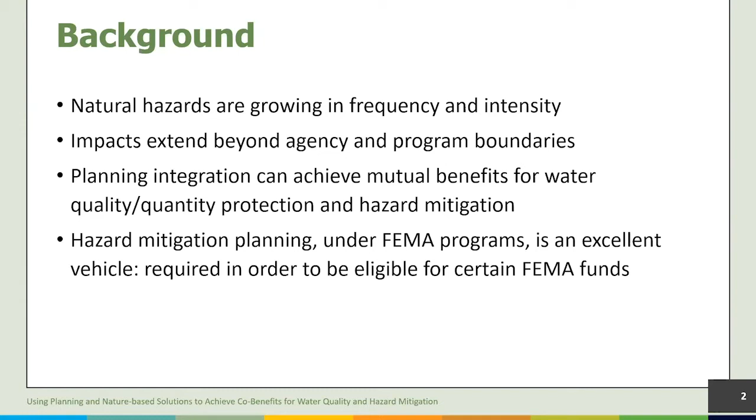Hazard mitigation plans are required for a state to be eligible for certain FEMA funds, so these plans are a logical place to highlight this connection and plan appropriate actions. Several states have successfully integrated environmental goals into mitigation plans. We'll provide HMP excerpts from these states later in the presentation.

Alone, natural hazard and water quality programs face barriers to success because they have limited resources and staff to tackle issues. When programs are integrated, success of achieving mitigation and environmental goals dramatically increases. This makes sense because the issues aren't independent, nor should they be siloed.

Natural hazards affect water quality. For example, heavy precipitation events and rain-on-snow events often lead to flash flooding in vulnerable areas. Land management and planning can exacerbate flooding by changing the perviousness of a watershed and leave communities more susceptible to inundation. Uncontrolled discharge of pollutants, for example chemicals, during flooding can also pose risks to groundwater and surface water.

Water quality impacts health risks. For example, harmful algal blooms can pose a threat to human health and aquatic communities. Toxins produced by certain harmful algae and cyanobacteria can cause water-related illnesses in humans, pets, and agricultural livestock. Exposure occurs through direct contact with recreational water or consumption of contaminated drinking water, fish, and shellfish.

The goals of today's presentation are to see how nature-based solutions can be used to protect water quality and help mitigate natural hazards, review a local project using nature-based solutions, and learn more about major water quality planning and funding programs. We won't go into detail about hazard mitigation planning since we know this audience is familiar with the HMP planning process. We'll walk through efficiencies gained when integrating water quality and hazard mitigation planning, and learn how to set goals and strategies that allow for integrating the two types of planning.

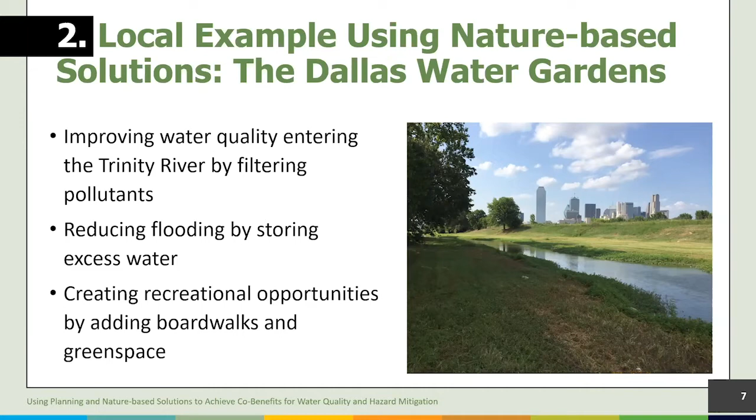The actions that ensure long-term success of the Cedar neighborhood project include incorporating future community investments and goals, monitoring water levels to document success and indicate maintenance needs, and integrating other area projects, including the Dallas Floodway Project, the Trinity River Corridor Balanced Vision Plan, and the Dallas High-Speed Rail.

The initial system design of the water gardens generally consisted of field activities, hydrologic and hydraulic schematic design, and ecological design. This initial study, completed in June of 2019, included an inventory of ongoing and proposed infrastructure projects in the study area, evaluation of soil properties, groundwater and surface water quality evaluations, hydraulics and hydrology modeling, water quality modeling, and concept schematic and ecological designs.

The analysis consisted of evaluating several alternatives for mitigation of increased flood risk due to the conversion of the upper ponds to constructed wetlands. The evaluated mitigation options included capacity increase of the upper ponds via lateral expansion and excavation, using a gated structure to release water before a major storm, and adding underground storage features.

Each option was evaluated against 8 guiding principles, consisting of evaluating flood risk, water quality impacts, impacts to the local economy, habitat creation, connection to the Trinity River, visual appeal, mitigation of urban environmental impacts, and opportunities for active recreation and wellness. The recommended alternative consisted of a weir between ponds 3 and 4 as the primary water impoundment structure, and increasing the capacities of ponds 5, 7, and 8 through a combination of lateral expansion and excavation for flood risk mitigation.

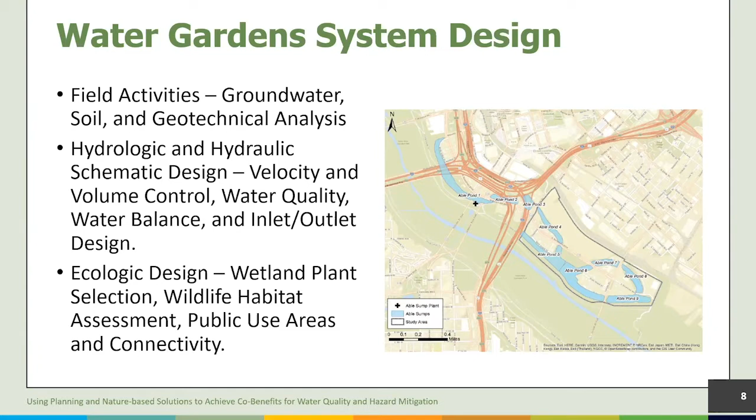The assessment of hydraulics and hydrology of the existing and proposed conditions were completed using XP-SWMM, a commercial version of the EPA stormwater management model. Important considerations for the modeling were the Able Sump Station and sump connectivity, existing and future pond connections, Able Sump pond interaction and sensitivity, and the 100-year floodplain.

All proposed alternatives were designed so as not to exceed the 100-year floodplain criteria. The stormwater model was also used to evaluate long-term hydrology conditions and to assess water quality impacts under existing and proposed conditions. The long-term modeling was also used to establish different zones associated with the constructed wetland, discussed later.

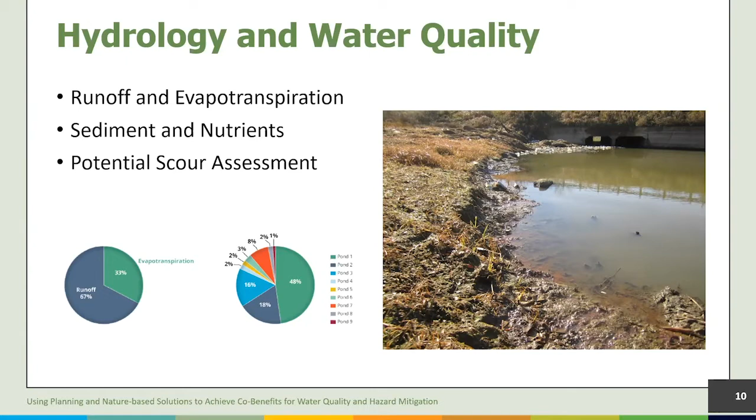4 alternatives were evaluated. Option 1 consisted of widening ponds 4 and 5. Besides a weir, this option requires expanding existing pond footprints onto nearby vacant parcels. Option 2 consisted of deepening pond 4, which requires excavation of 2 to 3 feet below the existing pond footprint. This is not an ideal option since the normal pool depth is deeper than desired, and there's potential for more pollutants entering the upper ponds during smaller events.

Option 3 consists of an automated control structure, which would require the city to operate the automated slide gate to reduce normal pool prior to large storm events. This option also does not require excavation or pond expansion. Option 4 consists of underground storage. This option also does not require excavation in the ponds, and instead proposes using underground storage or infiltration basins to temporarily store water.

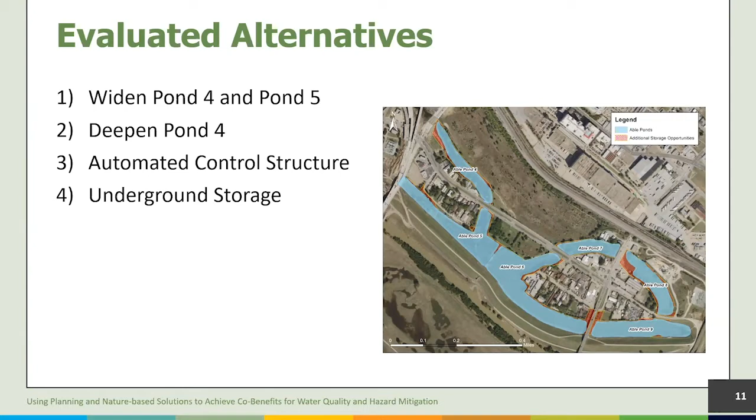All 4 alternatives were evaluated against 8 guiding principles, which consisted generally of connection to the Trinity River, mitigation of urban environmental impacts, enhanced visual interest, improved water quality, absorbing storm events, encouraging active recreation and wellness, creating habitat, and boosting the local economy.

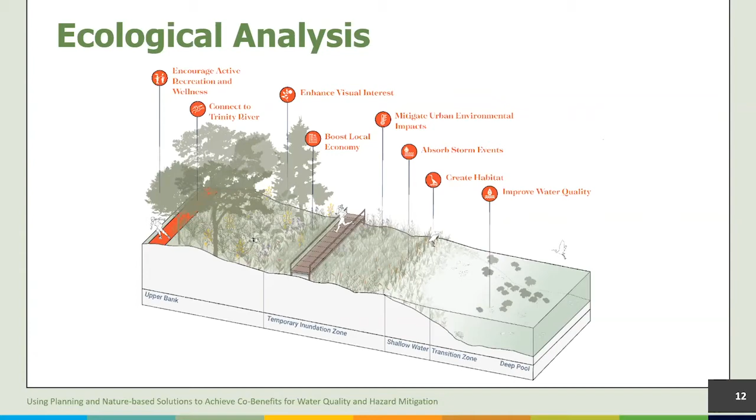Stormwater wetlands are comprised of continuous vertical zones that mimic the structure and function of natural wetlands. Zones are defined by relationship to permanent water level, frequency of inundation, water depth, and/or slope. Different zones provide different ecological services, including but not limited to pollutant removal, habitat provision, and erosion control.

Wetland design, including the upper bank, temporary inundation zone, transition zone, and deep pool, were informed by the hydraulics, hydrology, and water quality modeling. Plant community selection for each wetland zone was based on suitability for the given geography and climate.

The subsequent phases of this project will consist of design and construction of Cadiz Street and Riverfront Boulevard bridges, subsurface utility engineering for adjacent utilities, survey of upper ponds, forebay or green infrastructure to prevent pond sedimentation, and U.S. Army Corps of Engineers permitting.

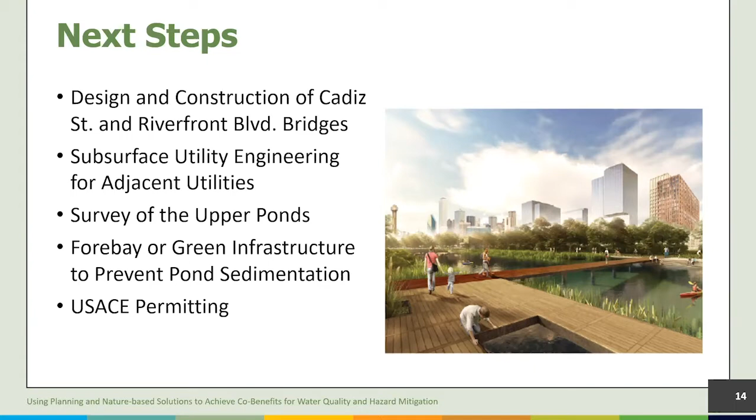Thanks, Sam. So the next part of the presentation, you'll learn more about water quality protection and planning at a high level. So what are these types of planning programs and what do they achieve? You'll understand efficiencies gained when you integrate water quality and hazard mitigation planning, and then you'll learn how to accomplish all of this.

All right, now let's dive into an overview of water quality programs and associated plans, the program objectives, and elements of each program that are relevant to hazard mitigation.

EPA water quality programs include the NPDES program, which regulates point sources like wastewater treatment plants, industrial treatment facilities, and stormwater from construction sites, municipal separate storm sewers, and industrial site runoff. As many of you know, the stormwater permitting program for cities with MS4s has been actively supporting the kinds of joint flood control and mitigation and water quality objectives that are at the heart of integrated hazard mitigation and water quality planning.

The non-point source pollution control program overlaps significantly with hazard mitigation goals. The NPS program, which includes a planning element using watershed plans and cost share funding to implement BMPs, is particularly relevant for hazards that might be related to drainage management in more rural areas.

Next is drinking water source water protection, which protects sources of drinking water from harmful pollutants, such as chemicals, sewage, and other harmful substances. Another relevant program focuses on wetland protection and restoration.

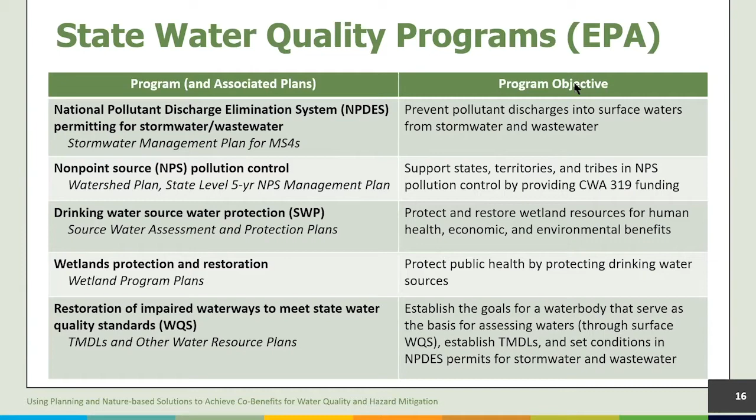All of these water quality programs have elements relevant to hazard mitigation, but in the interest of time, I'm just going to focus on two.

Stormwater management plans developed as part of the NPDES program are included in the HMP checklist of requirements. The NPDES program also implements activities that alleviate flooding hazards while improving water quality.

The key elements of the watershed-based planning approach used by the NPS program include point source and non-point sources of pollution, through a process that closely resembles the planning steps for hazard mitigation planning and the National Flood Insurance Program's Community Rating System, or CRS, program.

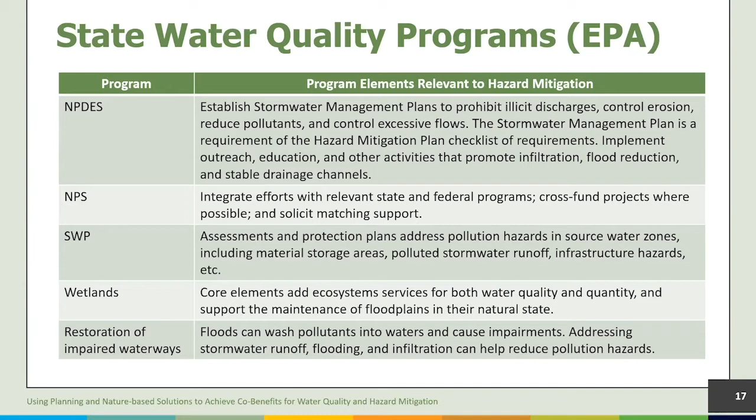BMPs funded by this program can also reduce hazards. For greatest effectiveness, it's a good idea to base NPS watershed plans on the flood and drought risk components of HMPs.

I've mentioned hazard mitigation planning without going into detail. As many of you know, hazard mitigation planning involves engaging stakeholders, conducting an assessment, defining goals, identifying opportunities, and creating a strategy to address problems or deficiencies.

Now that you have a better understanding of water quality programs and planning, let's look at how to integrate those planning steps with hazard mitigation planning. I'll do a bit of a crosswalk on the planning programs and their steps, discuss which stakeholders to involve, and talk about funding opportunities.

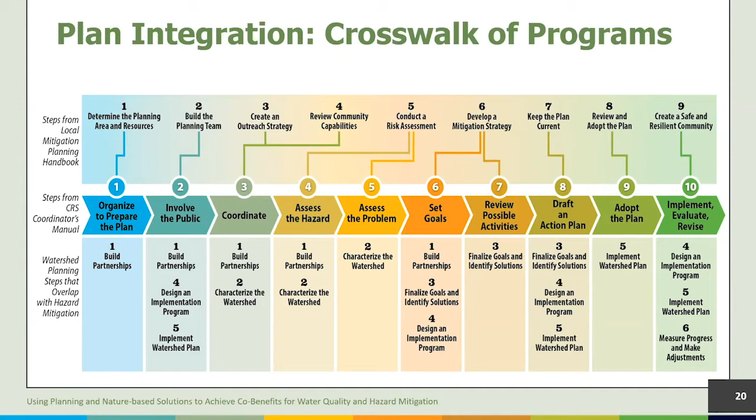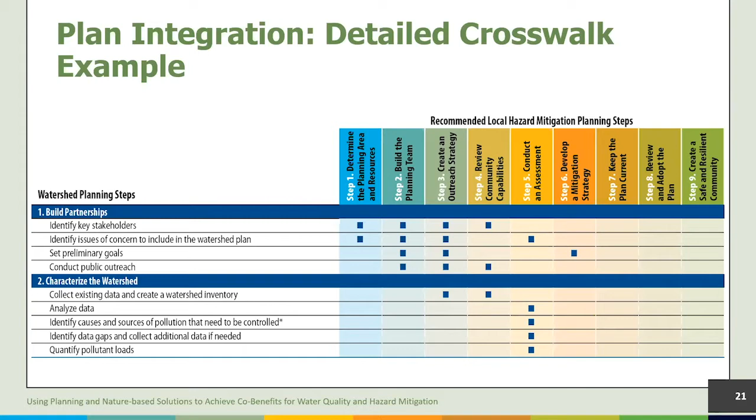They can then help local hazard and water quality planners explore how best to fold their efforts together in those areas where it makes the most sense.

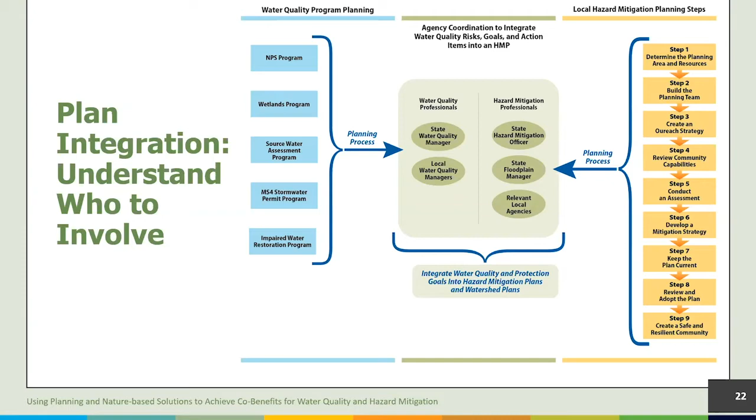We know funding dictates a lot of what programs are able to accomplish. By integrating program efforts to achieve shared benefits, managers can make limited dollars go further. Funding an integrated effort usually depends on the type of financing typically available to hazard mitigation and water quality planning. So grants, loans, taxes. Most people are familiar with these, and sources are available on both the hazard mitigation and water quality side of the house.

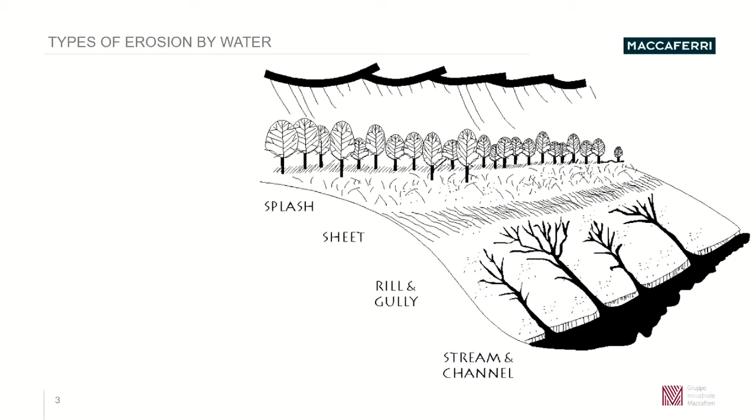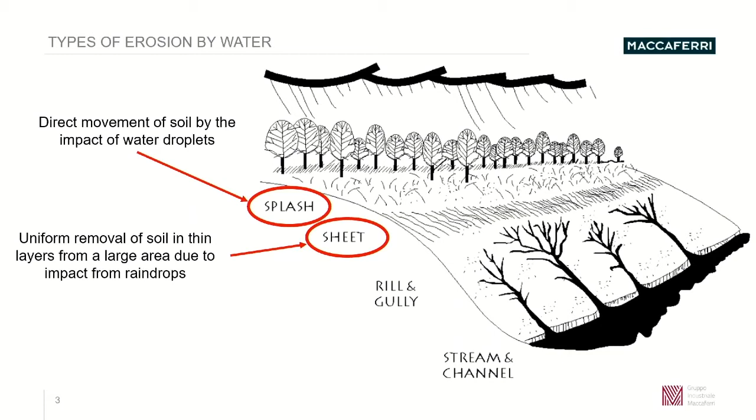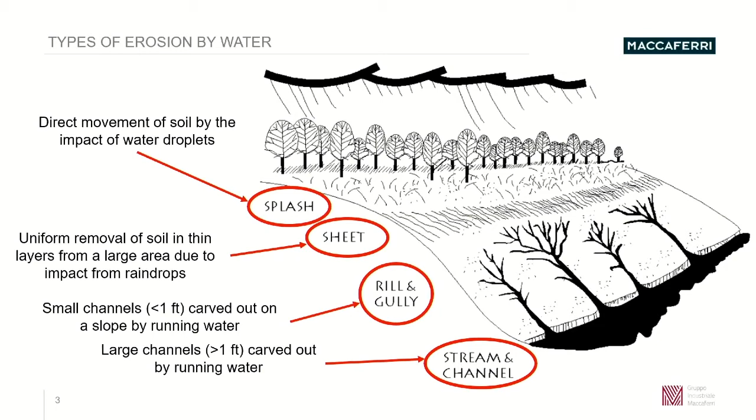But let's start introducing the type of erosion by water. The very first step is the so-called splash effect, when you have direct movement of soil due to impact, for example due to rain, of a water droplet. The second step is that you start to have uniform removal of the soil, and you see a very thin layer on top of the soil. After that, you have the rill and gully stage, where you have the creation of small channels, less than 1 foot, carved out on a slope by running water. And at the end of the day, you have the large channel, more than 1 foot, carved out, again due to running water.

What about wind? You also have erosion by wind, with three main types. Soil creep, when you have a rolling of larger soil particles across the surface, with some bouncing. Also suspension, where the finest particles get into the atmosphere over long distances due to strong wind - for example, in Italy you can find desert particles or soil particles from the Sahara region, so they can travel very long distances. And last but not least, the saltation type of erosion, where you have movement of soil particles with sharp bounces along the surface, displacing additional particles with each impact.

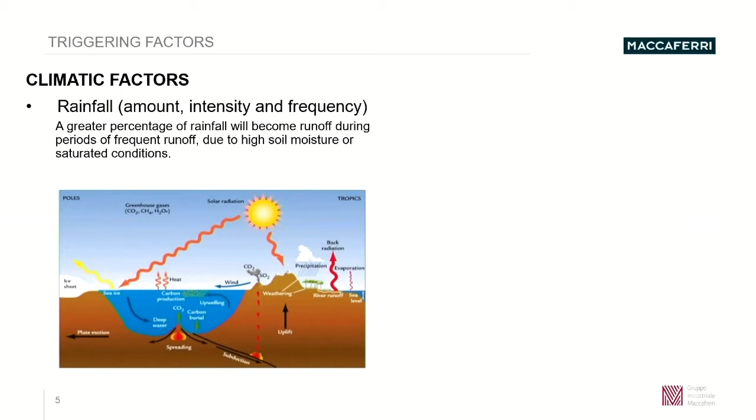But not only water and wind - other triggering factors can help the natural erosion process, such as climatic factors like rainfall. We need to check the amount, the intensity, and the frequency. If we check, for example, the US, using information from USGCRP, you can find that in most US regions, if you check the total annual precipitation and the heaviest 1% of events, in many areas the indicator shows an increase in the relative amount of rain that falls as heavy rain.

So the quantity of heavy rain is increasing, only in the West and Pacific area is it decreasing. But most of the country now receives more rain as heavy rain than it did in the past.

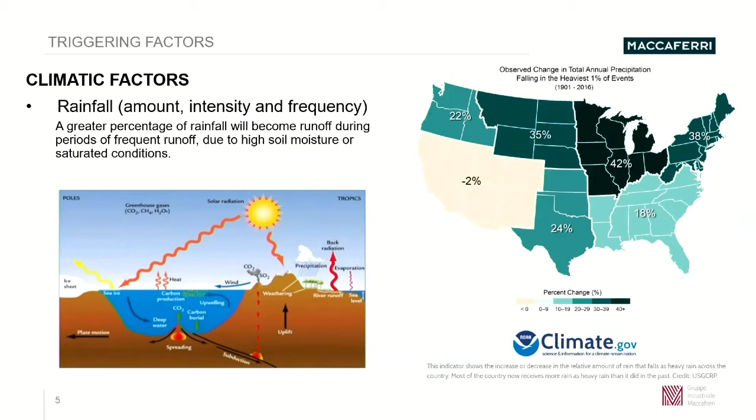But not only that, the temperature can affect the erosion process, because the temperature can affect the organic matter present in the soil. And if we check the heat wave frequency, we can see that it is higher, and the heat wave season length is always higher.

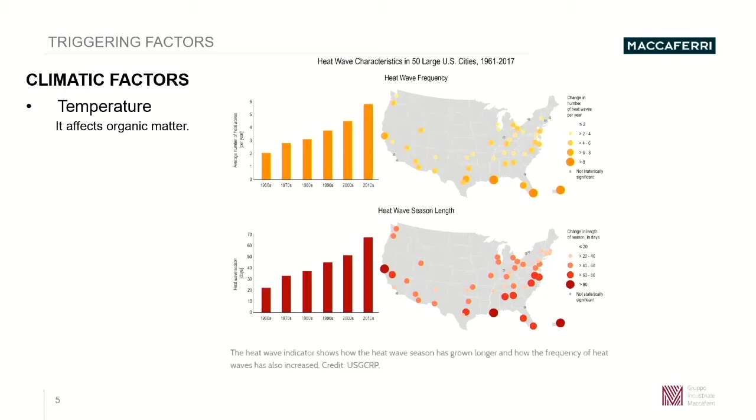So basically the organic matter is affected by this change in the climate, but also the vegetation. The vegetation is very important, is paramount for the protection of the soil.

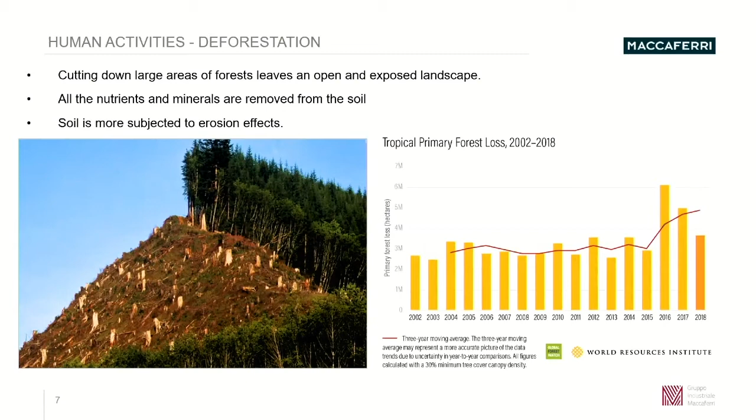Going forward, some human activities can also affect the erosion process, such as deforestation. If we cut the vegetation and trees already in place on top of a slope, the nutrients and minerals are removed from the soils, and the protection of that soil is also removed. So that soil, previously covered by vegetation, is now exposed directly to rain, wind, and all the aspects we covered before. So deforestation can affect the erosion process.

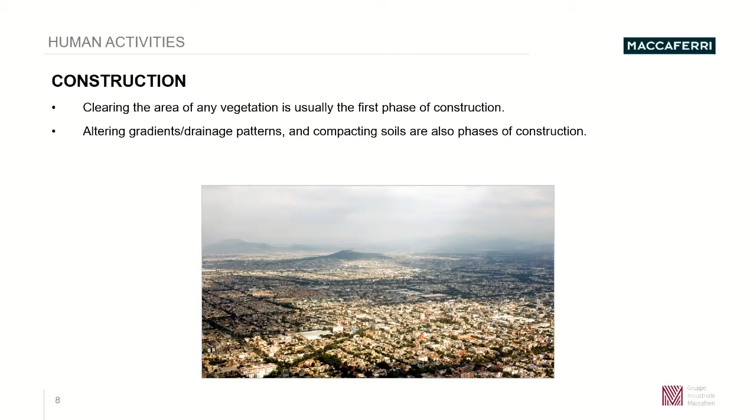But what about construction? When we construct a new residential area, we are changing the environment, changing the vegetation, altering the gradients and drainage patterns, and compacting the soil. If we check, for example in the US, the percentage of urban and built-up land area from the 1980s up to the 2000s, we see that urban areas are increasing. What does this mean? We have higher runoffs and always bigger quantities of water because we are increasing the impermeable surfaces on top of the land.

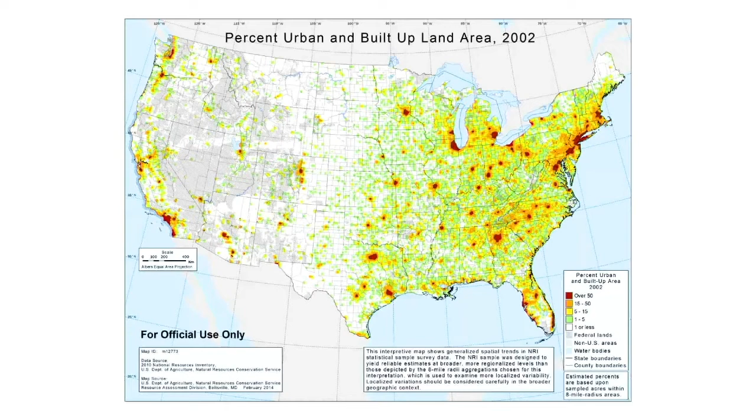But when we saw the definition of erosion, we saw what can affect the erosion process, but we also need to check the erosion control classification. We can check as a source the Federal Highway Administration manual, found in the design of roadside channels with flexible linings. The Federal Highway divides erosion control solutions into main families: rigid linings or flexible linings. For rigid, we can think about soil cement, stone masonry, or grouted riprap to cover the soil.

But what about flexible linings? Also in flexible linings, we can divide into long-term solution, transitional, or temporary. For these, we can always check the classification, for example checking the ASTM or the IECA, the International Erosion Control Association, or also the Erosion Control Technology Council, in order to define this type of system.

For example, today we're going to see examples of a turf-reinforced mat, non-degradable, used for erosion control application. And in this case, we have some examples of materials that can be used. If we are talking about temporary erosion control applications, we have the so-called erosion control blankets that are degradable. The material can be, for example, coconut fibers, straw fibers, or natural fibers.

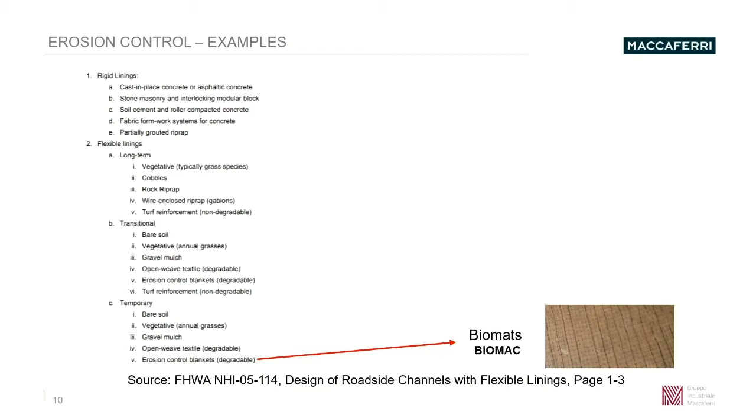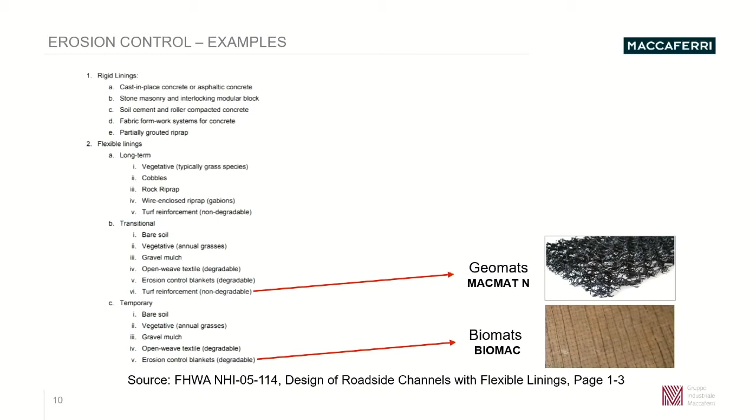They are temporary. If we have a transitional solution, non-degradable turf reinforced mat, we also have a three-dimensional mat that can cover the soil and protect it from erosion due to water or wind. We also have a long-term solution such as the high-performance turf reinforced mat, reinforced with a different material, and also things like wire-enclosed riprap or using gabions for erosion control applications.

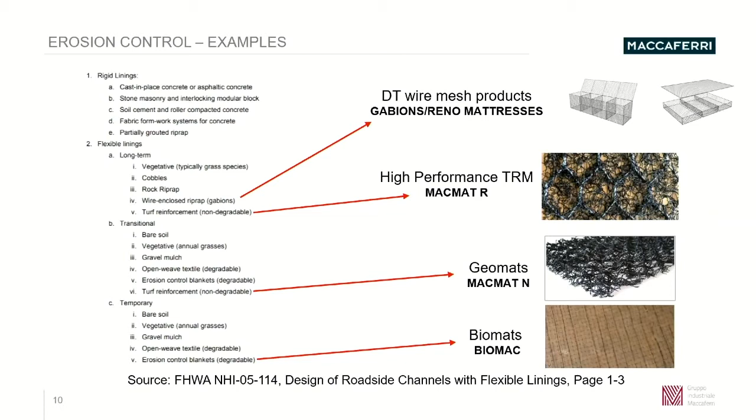But today in the presentation, we are going to focus on the use of geosynthetics for erosion control. And what's the target of these materials?

We need to create a physical barrier which absorbs water and wind impact on soil. Those solutions are very effective in preventing or limiting soil loss. And we want to enhance vegetation growth, because we saw how vegetation influences erosion control and the amount of eroded soil lost per year. You remember the Utah study that we presented. And also, at the end of the day, what we want to do is increase the shear strength of the soil.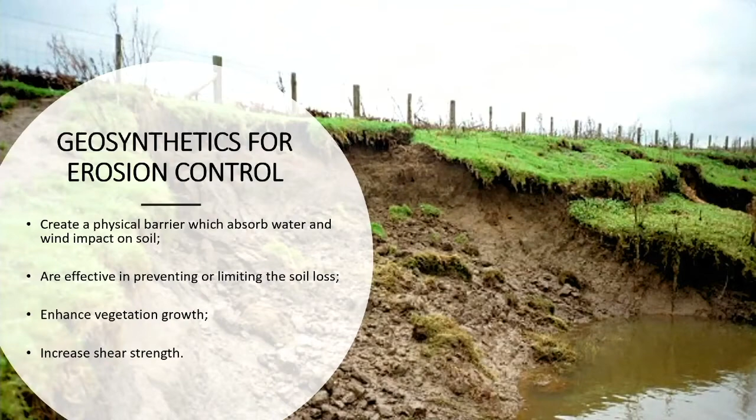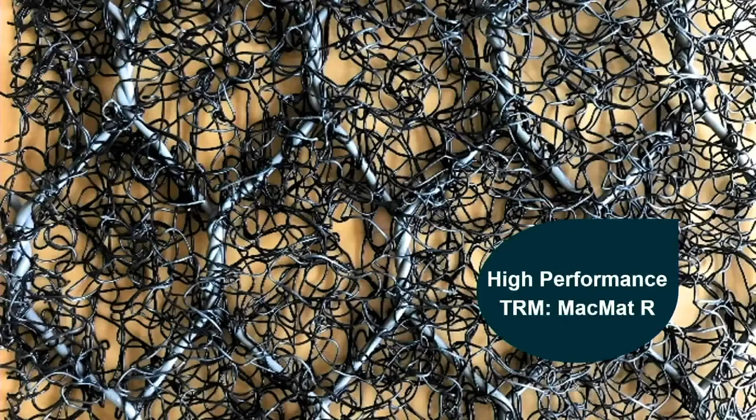As an example, if we talk about turf reinforced mats, reinforced high-performance turf reinforced mats, we can talk about the MacMat R. So the MacMat R is a three-dimensional turf reinforced mat where you have a geomat, that is a three-dimensional erosion control mat, plus the reinforcement, which in this case is a double twist wire mesh solution. This geocomposite can have different tensile strength and different shear strength, but what we want is to couple together the double twist wire mesh with the MacMat.

Why that? Because we want to create something that can enhance and help the vegetation grow. So this material is designed to work in presence of vegetation. So basically what we want is the vegetation to grow through the system, and the roots of the vegetation can grow through the three-dimensional turf reinforced mat because it has more than 90% voids. And as you can see, the vegetation can grow easily.

But we can also help the vegetation grow with different techniques, such as, for example, the use of local topsoil or imported topsoil with a mix of seeds. Also, you can increase vegetation covering and growth possibility with hydroseeding on top of the material, as you can see in the left image.

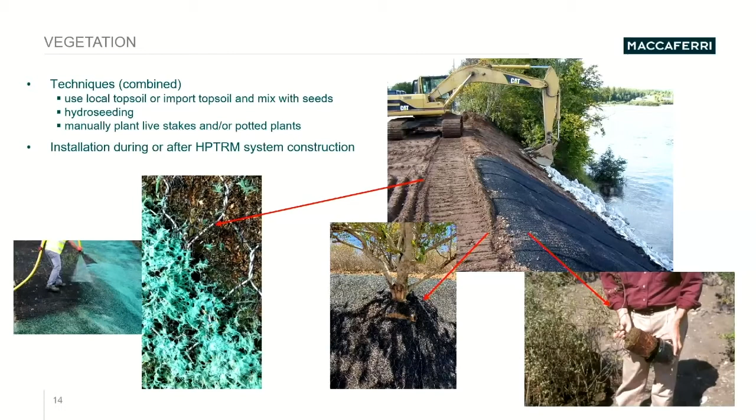And also, this is very important: we always recommend checking with a bioengineer, a local bioengineer, in order to select autochthonous plants, so that autochthonous plants grow into the environment.

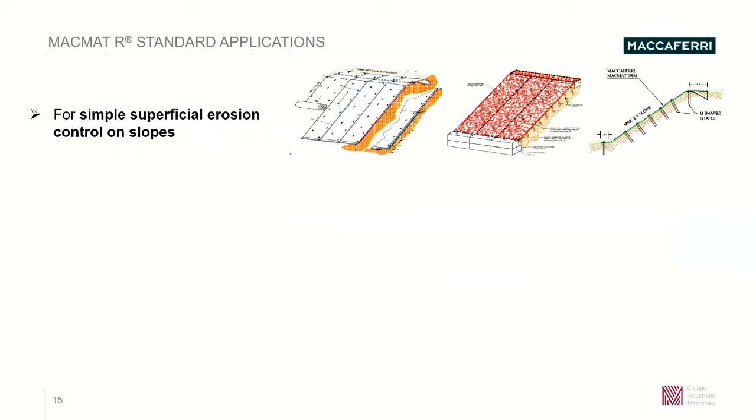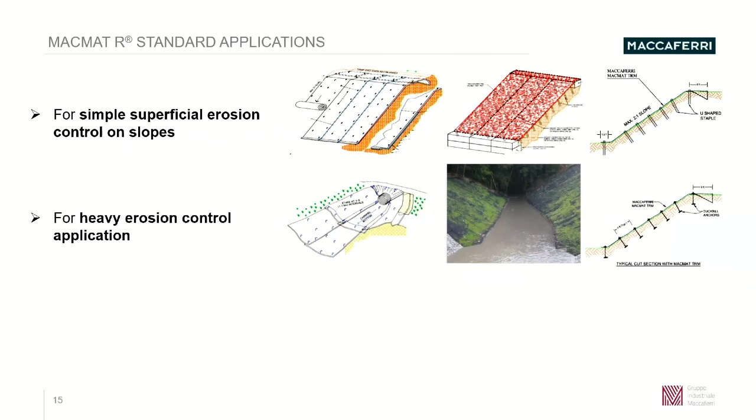Standard applications of these materials: you can use them to protect from erosion, for simple superficial erosion control on slopes. You can also use them for heavy erosion control applications, like hydraulic protection at the outfall of a culvert, and also, for example, for flexible revetment and soil nailing stabilization for rockfall applications.

But let's start talking about some examples, because we want to present, across the United States, some examples of erosion control applications. So, Texas.

Fort Worth, in 2010, there was a problem with a new development of a residential neighborhood. As I said before, whenever we are building a new residential area, there is an impermeabilization of a very large area, and so there was formation of significant stormwater runoff during heavy rainfall events. Basically, the target of this solution was to create a system to control and limit the erosion process. At the end of the day, the solution selected was the double twist wire mesh reinforcement with the geomat plus gabions, as you can see.

So if you see the application, very close to the culvert you have the wire-enclosed riprap, or mattresses, the gabions, in order to protect the soil. And also on the sides of the banks, you can easily install the turf reinforcement with the double twist wire mesh, where you have basically two materials, two solutions in one: the erosion control application plus the steel wire mesh.

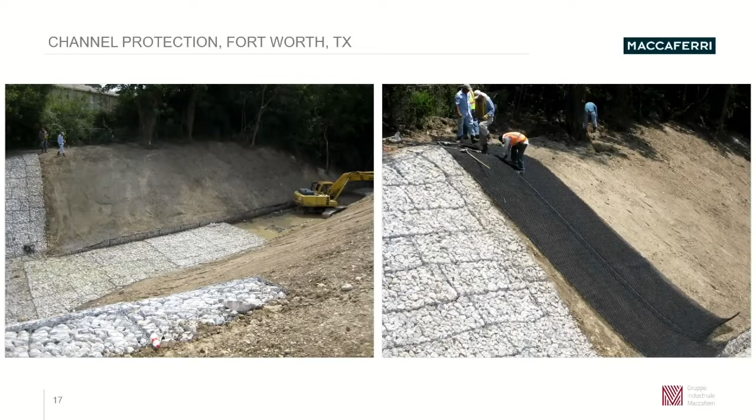Sorry about that. Basically, as we go forward, you can see some pictures of the installation after some time. You have the vegetation growing through the material, and this is what we want. So this is an example where you have the presence of water, so you cover with a long-term solution such as gabions or mattresses, and after, on the slopes, you use the MacMat.

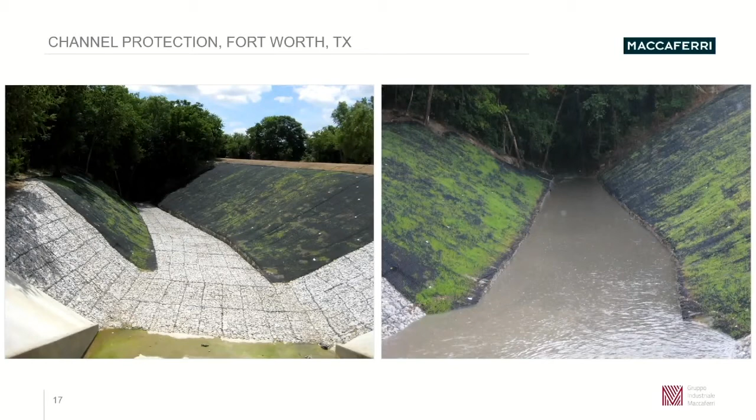What about another example? This is in Canada, Montreal. We had a new area that was excavated, and basically they had a problem with erosion.

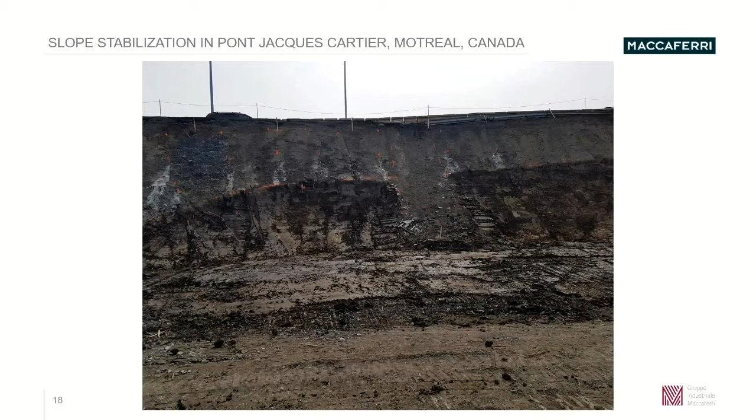The issue in this case was that there was a very steep slope, so the solution was a soil nailing application using also erosion control application on the slope. Basically, what you see, they used the so-called MacMat, and at the end of the installation, the vegetation already started growing through the system.

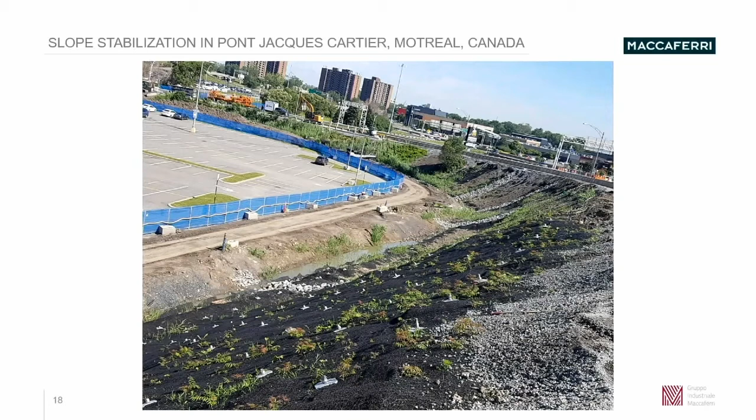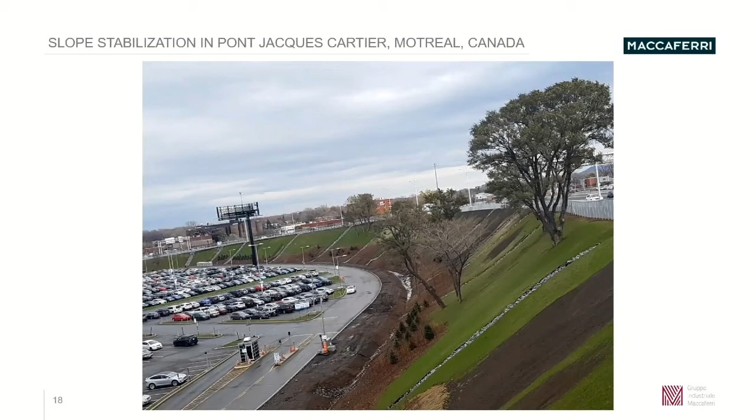We always recommend covering the slope with topsoil, because at the end of the day, we don't want to see the material exposed. We want to see the vegetation. And as you can see, the final result is a completely well-established vegetation on top of the slope.

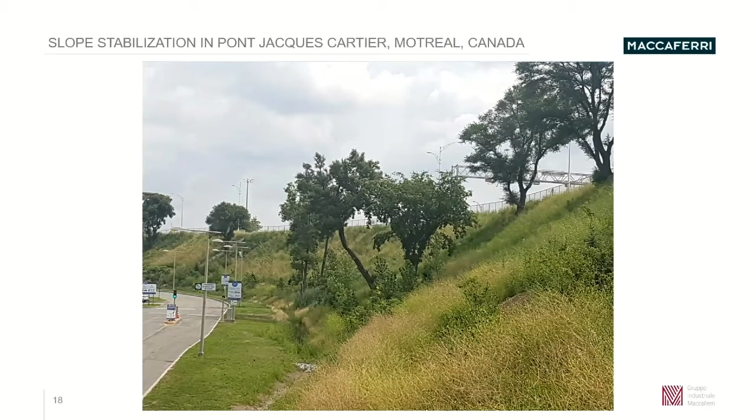Another example, moving to the US, New Jersey, northeast region. We have an area that was prone to erosion because there was a new development area, and due to heavy rainfall season, there was a big erosion.

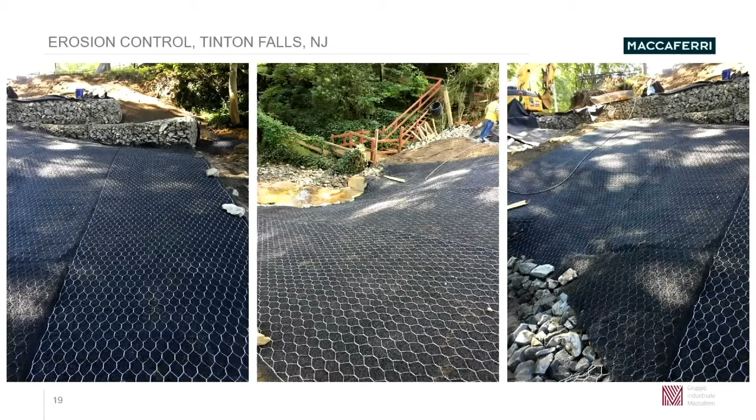The system selected to cover the soil was the MacMat-R. It's very easy and quick to install, and you can install it all in one, you don't need separate erosion control and reinforcement. You have a mechanical connection between the different rolls, and at the end of the day what we want is the vegetation growing. So we protect the environment while the vegetation is growing, but the long-term solution is to have the vegetation established there.

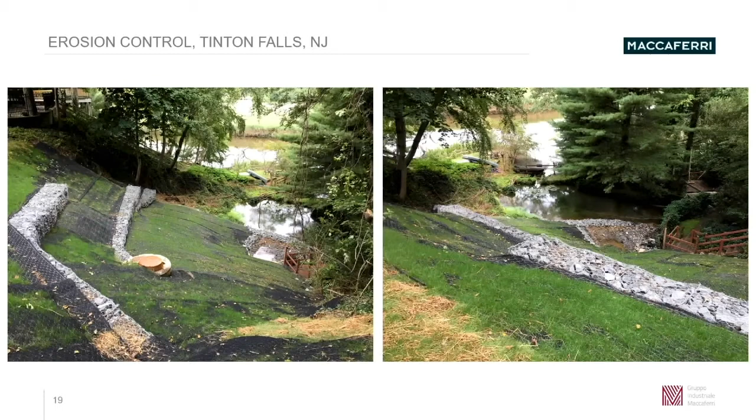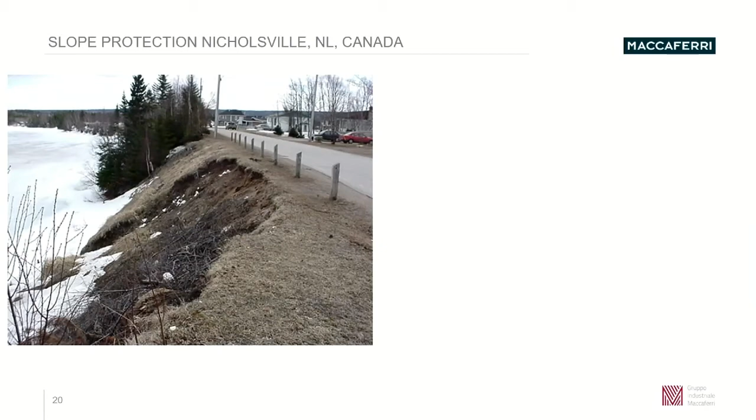Another example in Canada, due to an erosion problem at the top of a slope. These cases are very common internationally. The solution was to fill the global instability that happened, so you fill that area, place the erosion control mat with the double twist wire mesh on top, the MacMat-R, fill it, and cover it with topsoil.

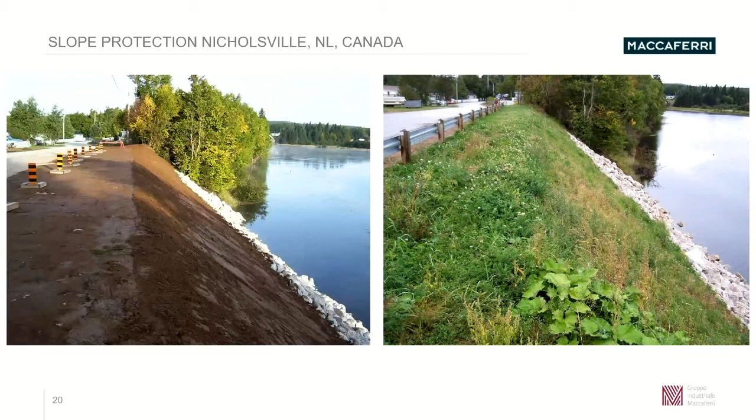It's very important that before starting the installation, you select the exact, good mix of soil. It's important to use autochthonous seed, because if not, you can have vegetation that lasts maybe one or two seasons, but since it's not autochthonous, it cannot live in that environment. So we need to select the soil very well.

Another example, moving to Louisiana state, at the Cane River Creole National Park. They had to cover the slopes of the river. As you can see, you cover the slopes with the MacMat, and the vegetation, which depends also on the type of climate, establishes very quickly. If you check the picture on the right, you don't see any material below the vegetation. So what we want is vegetation establishment as soon as possible in order to protect the soil.

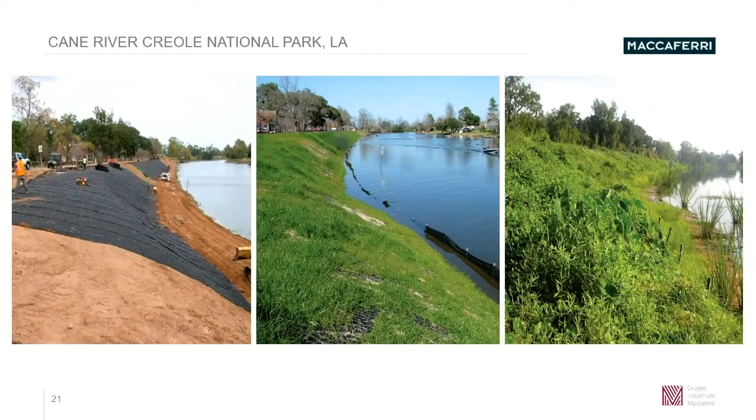Last but not least, we'll talk about another project in Texas, in the Houston area. Construction was back in 2019, because after Hurricane Harvey slammed into the coast of Texas in 2017, the Buffalo Bayou became a raging torrent of water and debris, causing significant damage to the bank of the torrent.

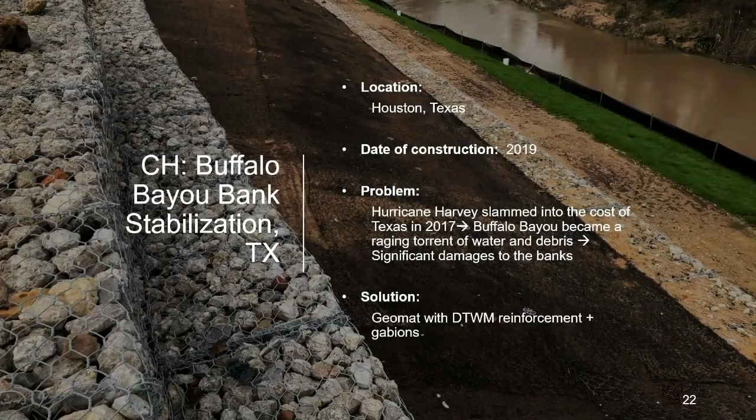The solution in this case was to use the MacMat on the slopes, plus also the use of gabions for bank stabilization. Here's a picture during installation: on the slope you install the MacMat, then you create a trench in order to anchor the material. This shows how easy and quick the installation is, and this is the final result.

I want to show you again the purpose and aim. In this case, gabions were also used to create terraces. As you can see, the vegetation establishment was very quick and very good, because the vegetation cover is mandatory, it's paramount to control and try to control the erosion.

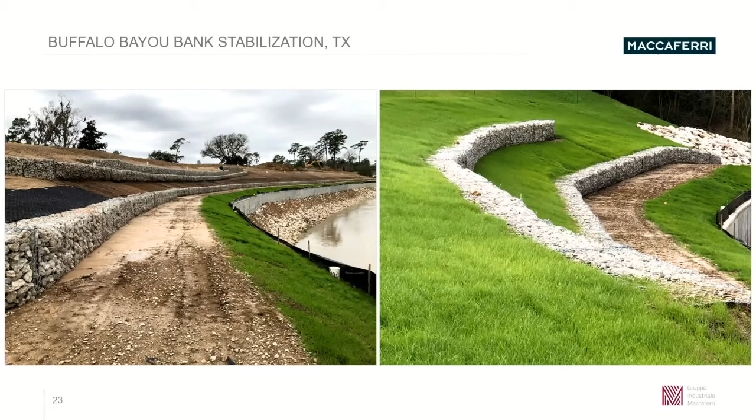On the other side, we have a special application for dam safety, because nowadays it's very important to protect dams. You can use the MacMat against burrowing animals, because they can create tunnels inside the dams and decrease the global stability of the dam.

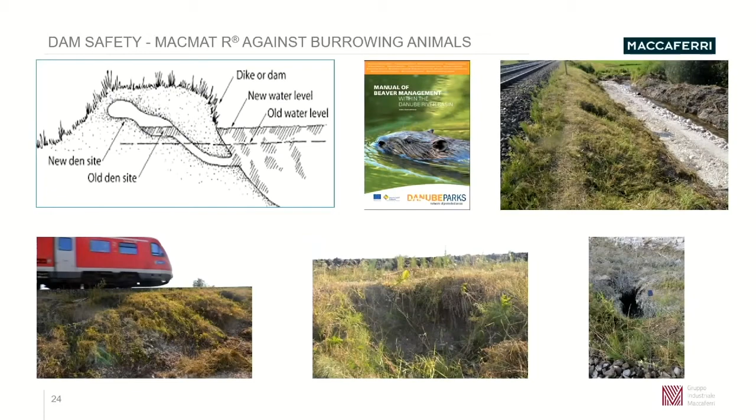You can use the MacMat to cover the slopes and create a barrier where burrowing animals cannot enter, cannot damage the dam, and cannot create tunnels that can lead to global instability of the dam itself.

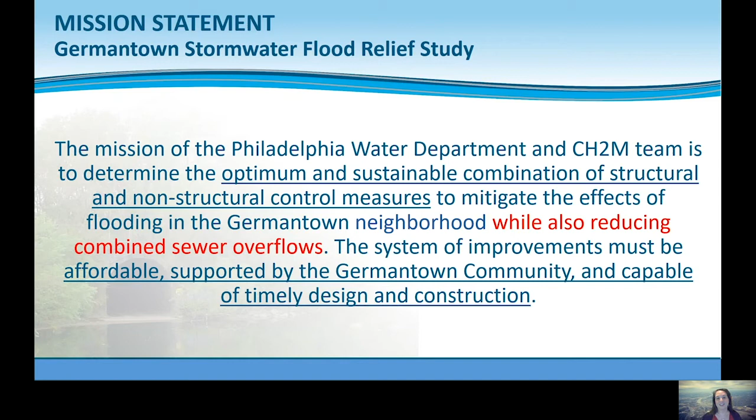So there's a lot there — the project certainly had some lofty goals. It's located in Philadelphia along the former Wingohocking Creek, which you can see is now heavily urbanized and has been sewered, as many of our urban systems are.

Germantown has a long history of wet weather-related basement backups and surface flooding, and has experienced multiple significant events. The 9 square mile sewer shed has over 200 miles of combined sewer mains of various sizes, geometries, and materials. The area has over $8.7 million in estimated annual damages, including $1.6 million in vehicular damages. Three distinct storms since 2004 alone caused over $25 million in damages, and unfortunately these do include loss of life.

We were given a number of 6.5 feet observed, and the model gave 9.54 feet. We dug deeper and found those stairs are 3 feet tall, so it's very likely the 6.5 feet was a reference actually inside that church, with no creek anywhere nearby. So the 9.5 foot model depth is from the ground, making the two comparable, especially depending on the observed measures we had elsewhere in the watershed.

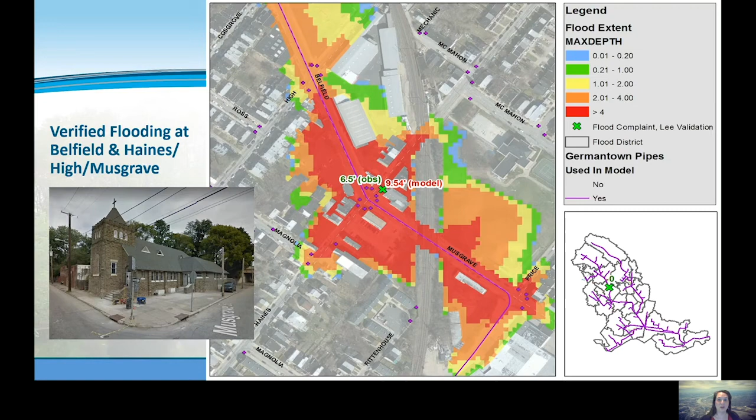Six additional synthetic recurrence interval storm events — the 1, 2, 5, 25, 50, and 100-year events — were also analyzed consistently to demonstrate potential flood mitigation over a range of storm intensities and precipitation totals. Five historic storm events ranging from about the 5-year to the 100-year were characterized using radar rainfall data, and used to evaluate existing conditions and each alternative to provide historic context for the synthetic return intervals and design events.

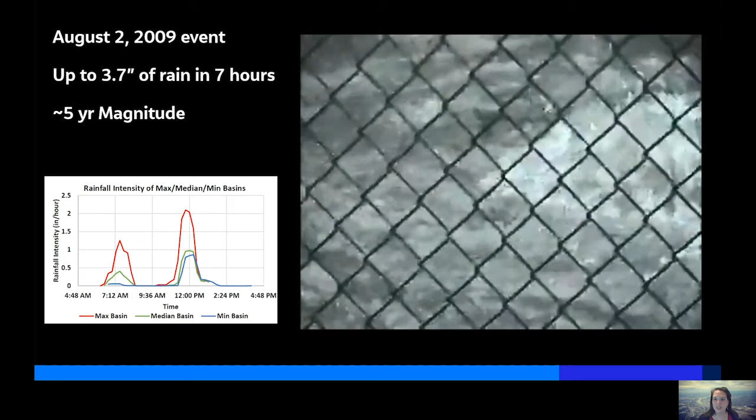Radar rainfall data was available for each historic event and used for storm characterization based on the peak intensity in each modeled subcatchment. The highest subcatchment peak intensity for this storm that caused that classic CSO geyser from a manhole was about 3.7 inches of rain in 7 hours.

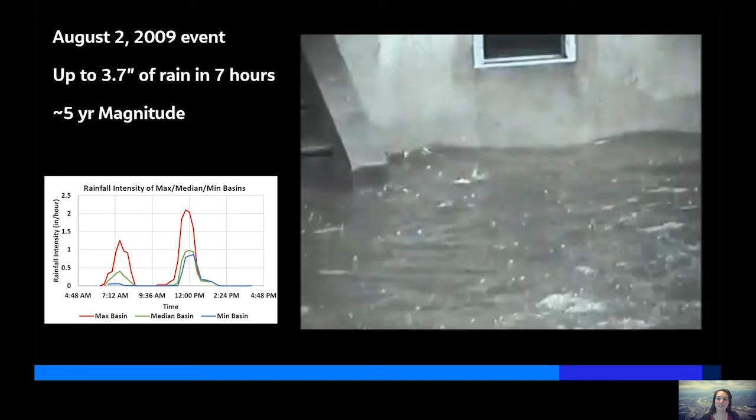That corresponds roughly to greater than a 10-year storm event. Overall, we characterize this as about a 5-year magnitude. Overall, the rainfall in each catchment ranged from less than 1-year peak intensity to greater than 10-year. That represents the uneven distribution of rainfall for this event, which isn't unusual for the cloudburst type high-intensity events that typically contribute to urban flooding.

So what was our study process? Feasibility analysis began with alternative identification that included specific investigation of a range of stormwater management technologies and reviewing various alternatives previously developed by PWD.

An initial feasibility assessment screening updated the existing hydraulic model to include a 2D surface in PCSWMM. Alternatives carried forward to the next phase were optimized in the AIM2 process, as shown here, with a damage analysis performed for the top performers, allowing selection of high-performing alternatives for further engineering review.

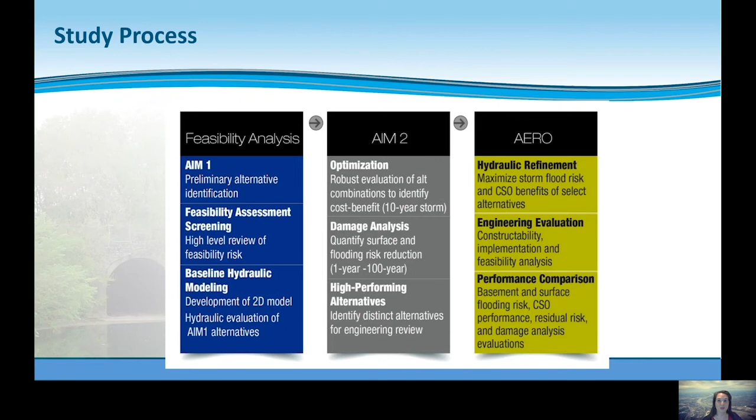The final phase of the project took a more in-depth look at the final 2 alternatives as part of the AERO report. Flood risk reduction and damage risk reduction benefits were quantified for each alternative.

Many FPIs are located at bowl locations in the topography, and overland flow velocities into the bowl can be quite high. The maximum flooding depth counts at these intersections during the 10-year 24-hour design storm event were used during optimization and alternatives analysis as a high-level measure of alternative effectiveness.

Alternative development began with the investigation of a range of specific stormwater management technologies, including those with which PWD has previous experience, such as the storage tank they've built at Venice Island and tunneling technologies.

General categories of technologies included storage tanks, which you may typically think of as a CSO control measure, but they are used here for dual benefit. Tunnels, conveyance upgrades, green infrastructure, and non-structural alternatives for residual flooding, such as backflow prevention, property acquisition, and other site-specific measures.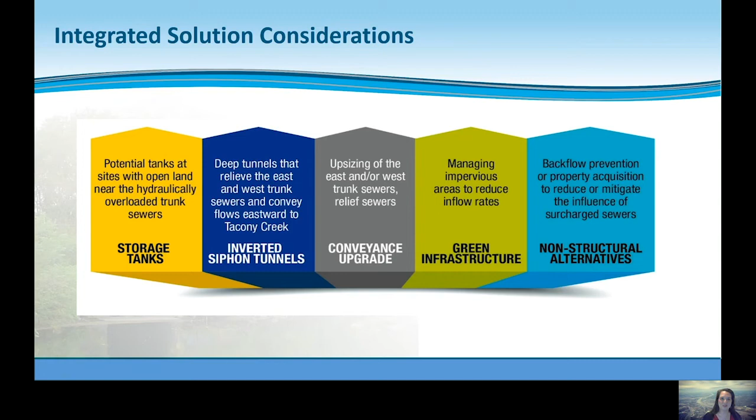The feasibility analysis and alternative development began with the investigation of about 20 alternatives selected from those initially identified by PWD. Unfortunately, none of these comprehensively address the challenges on their own.

You saw that east branch and the west branch, and one might help like the upstream half of the east branch, and then the west branch is out of luck. So it's really difficult to find the right solution to solve all of these problems together.

So when used, these alternatives really needed to be used in combination with others to be effective, but what's the right combination? This figure shows some of the initial alternatives analyzed and compares them based on the cumulative feet of flooding at key intersections for each return interval.

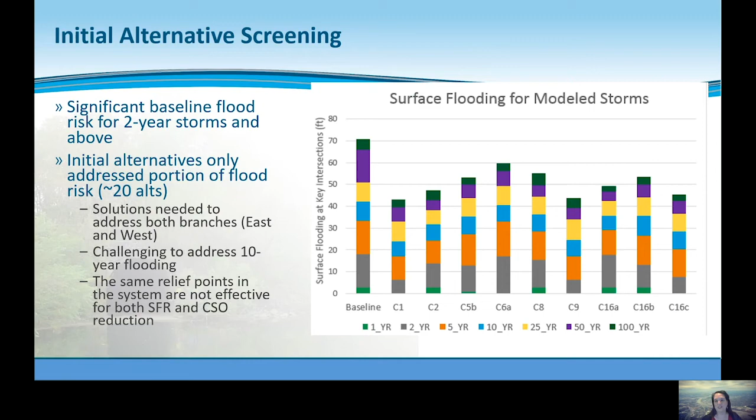A multi-criteria decision analysis tool was also used to screen benefits and effectiveness of alternatives and to explore the weighting of different criteria and to support the decision-making to move into the next phase.

The initial individual alternatives selected from what we just talked about, and some additional alternatives including storage and tunnel configurations, were analyzed in combinations with an optimization engine to evaluate the effectiveness over 1,600 unique alternatives formed from combinations of these technologies.

The 2D surface was removed from the PCSWMM model for this optimization purpose and replaced with simplified surface sections representing the known overland flow paths from the 2D, to speed the optimization simulations.

The optimization engine provided an extensive hydraulic performance screening of both the alternatives and the types of technologies themselves. Scoring was based on basement flood risk reduction, surface flood risk reduction, and CSO benefits, and provided a thorough representation of the solution effectiveness. Cost, residual risk, and feasibility were also considered.

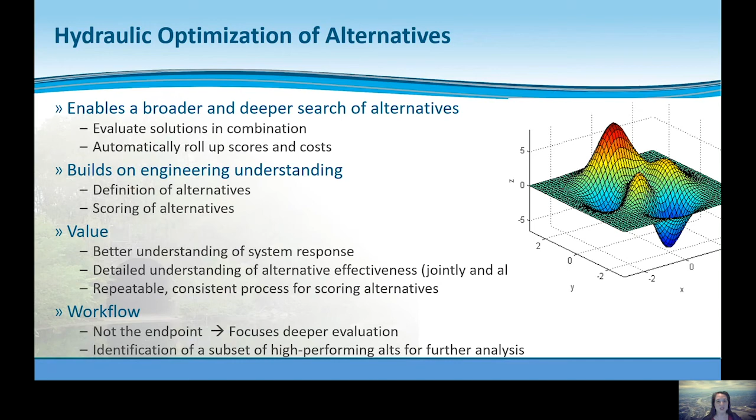This figure demonstrates the overall optimization workflow goals. First, 20 or 30 standalone options were selected from the feasibility study and run in all combinations using optimization technology.

Hazus damage methodology was integrated with the optimization routine, allowing damage calculations for 90 of the highest performing optimized solutions. A small subset of the high-performing alternatives were selected using the weighted benefit scores for a constructability analysis and additional feasibility and benefit scoring. Ultimately, 2 high-performing alternatives were selected for final investigation.

This figure demonstrates the optimization output for the project, comparing life cycle cost against the weighted benefit score. The blue dots represent projects with the largest percentage of cost belonging to storage technologies, orange with conveyance technologies, and green with green solutions as the predominant component of the solution.

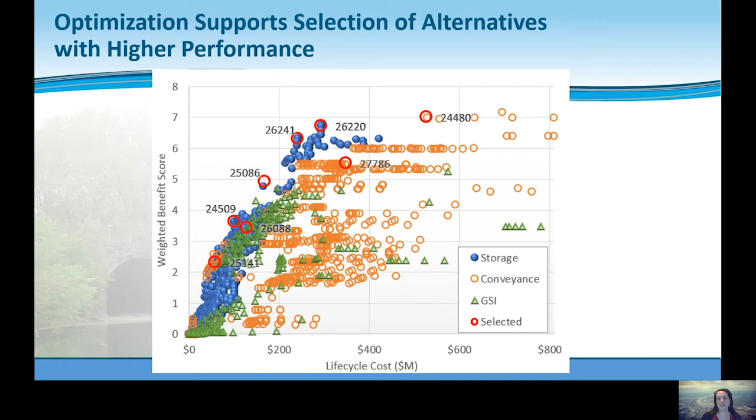An example of high-performing alternative selection is represented by the red circles. The alternatives along the Pareto frontier represent the highest benefit per life cycle dollar spent. Other performance metrics compared in this manner included the FPIs and CSO reduction parameters.

Two alternatives, storage and tunnel, were selected out of the optimization process for further investigation and refinement. The alternative evaluation and recommended outcome, AERO, report develops high-performing selected alternatives and documents feasibility, constructability challenges, and flood risk reduction benefits for each alternative. It also presents high-level planning recommendations for moving forward.

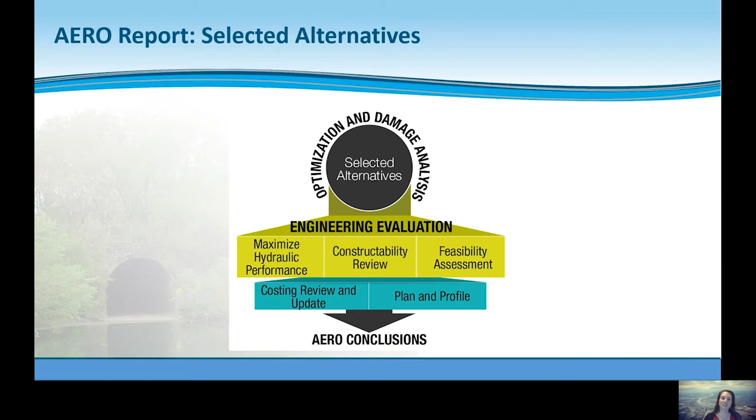The high-performing select alternatives from the optimization process are the storage tank alternative and the tunnel alternative. The report also investigated high-level options for residual risk associated with the two alternatives, including backflow prevention, localized alternatives, and green infrastructure. The storage tank alternative consists of 6 storage tanks configured for optimal flood mitigation and includes 2 sewer upsize projects.

Chambers, weirs, and conduits were sized to optimize flood mitigation. An iterative process was used to maximize the flood storage potential and reduce the peak storm event flow in the existing system to a minimum. Each tank was designed to ensure that a significant surface flood reduction impact is yielded by each individual tank location.

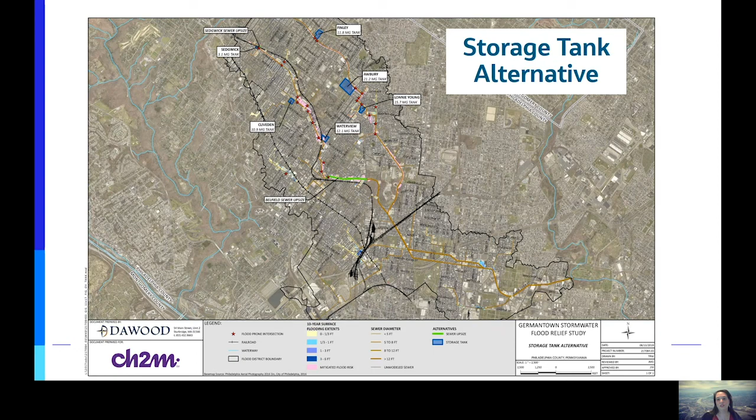For reference, the pink shading represents the mitigated flood risk, so the flooding that is no longer there in this alternative, shown as the 10-year event. Yellow indicates flooding that's less than 1/3 feet, so minor. And blue shows the residual flooding that is over 1/3 of a foot deep.

We've added additional trunk sewer improvements, upsizes, that were identified by PWD based on their known knowledge of the choke points in the system. The Mott MacDonald team developed the design to meet PWD's objectives for CSO capture, and the Jacobs team investigated feasibility and effectiveness for flood mitigation.

So what are our results? Flood risk reduction and damage risk reduction benefits were quantified for each alternative. This table shows a breakdown of our classic FPI flood depth ranges for existing baseline conditions and with the tunnel and storage alternatives during the 10-year, 24-hour storm event.

So you can see, for example, for what we consider to be the high priority flooding, anything over 2 feet deep, originally we had 11 intersections at that metric. The storage tank reduces that to 2, the tunnel reduces it to 1.

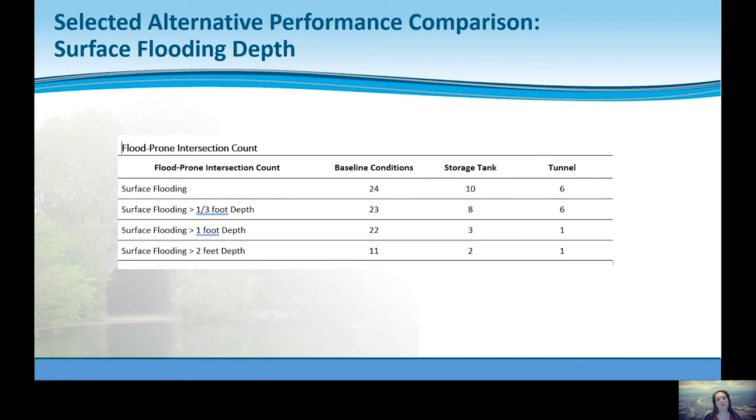Had the alternative mitigation measures been in place for the 5 historic storm events, significant reductions in damages would have occurred. For example, the August 2004 event would reduce baseline FPI high-risk surface flooding intersections with a depth of 2 feet or more, from 12 intersections to 3 for the storage alternative and 1 for the tunnel alternative, with basement flooding reduced from approximately 2,800 structures to about 930 for the tunnel alternative. This information allows stakeholders to think about alternative effectiveness in terms of storms that they unfortunately remember all too well.

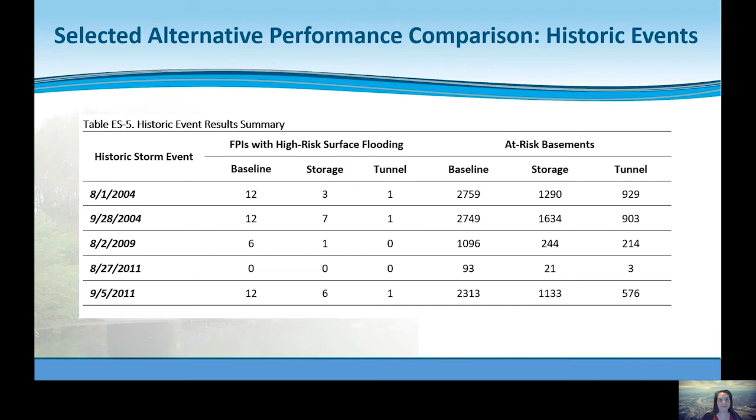Flood damage risk was analyzed using an approach consistent with FEMA's depth damage curve methodology, HAZUS. In this approach, assessed property market values were used on an individual structure basis and were compared against depth damage curves for structures, depth damage curves for contents, content to structure value ratios, and the modeled flood depth of the structure to estimate damage values for each structure.

Damages were calculated in a similar manner for vehicles. An annualized damage value was calculated based on a range of 7 storm events for each alternative, using these individual structural and vehicular damage estimates. Damages for alternatives were estimated with and without implementation of backflow prevention, as you see in the table.

For example, let's look at the tunnel alternative. Baseline condition damages, including vehicles, are $8.7 million a year that are reduced to $1.7 million a year by the tunnel alternative. If backflow prevention were the only mitigation measure taken, damages would reduce to $4.8 million a year. Adding the tunnel with backflow prevention would further reduce damages to $1.2 million a year.

The city estimates that backflow prevention for all structures estimated to be impacted by existing conditions to be approximately $20.6 million, noting that this does not mitigate any surface flooding risk. While backflow prevention for the residual risk on the tunnel alternative would cost $7.8 million in addition to the cost of the tunnel.

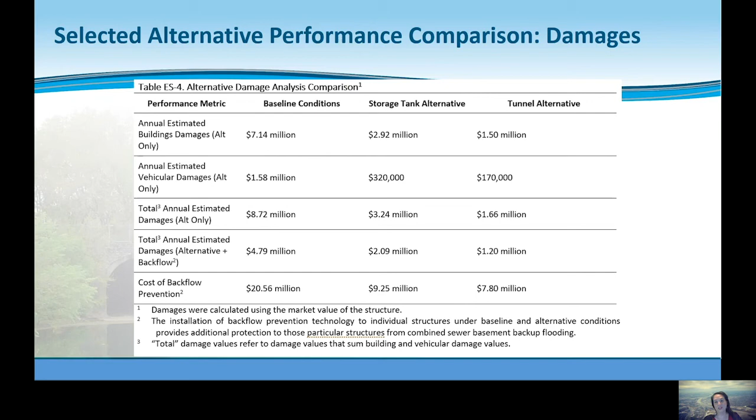This table has a high-level comparison of the effectiveness of each alternative against baseline conditions. Each of the alternatives presented reduced surface flooding by over 90% at the key FPIs. The tunnel alternative mitigates high-risk surface flooding, that's flooding of 2 feet or more, at 23 of the 24 key FPI locations. Each alternative carries the potential for CSO volume reduction, with the tunnel at the downstream end capturing significantly more CSO, and each alternative reduces annual flooding damages by over 60%, with an 81% reduction by the tunnel alternative.

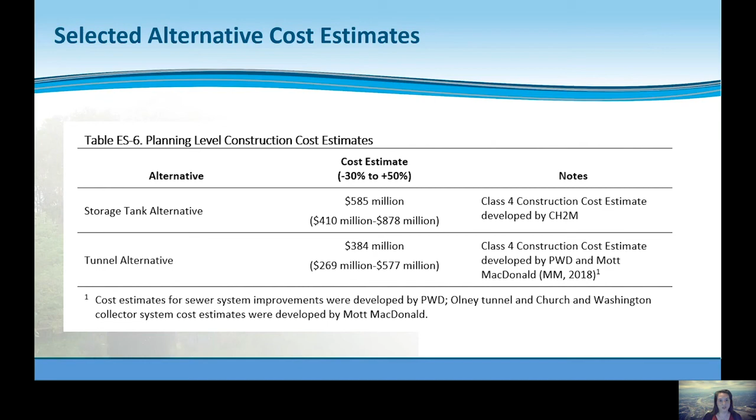A Class 4 construction cost estimate was developed by the Jacobs project team for the storage tank alternative, and by PWD and Mott MacDonald for the tunnel alternative. This figure shows the cost estimates for the storage tank and tunnel alternatives. The storage tank, Class 4, is $585 million, with the ranges shown there, and the tunnel coming in at $384 million.

Planning level feasibility and constructability analyses were performed for each site in the storage tank alternative, as well as for each diversion and drop shaft structure location in the tunnel alternative. Feasibility and constructability issues were identified for each major component of each alternative. Although the identification and documentation of these issues is intended to support PWD planning and alternative evaluation processes, in some cases additional information or discussion may be needed to fully evaluate feasibility. This may include site-specific geotechnical data and/or integration with other programs affecting system behaviors.

Although the extent of the impacts varies for the construction sites inherent in each alternative, some key issues identified during this assessment included difficult access to the site for construction and/or operation and maintenance, the need to acquire temporary or permanent easements in the right-of-way, the potential for extensive rock excavation, the potential for significant temporary disruption during construction, the potential for prolonged community impacts related to operations and maintenance activities, and the proximity to major transportation sites.

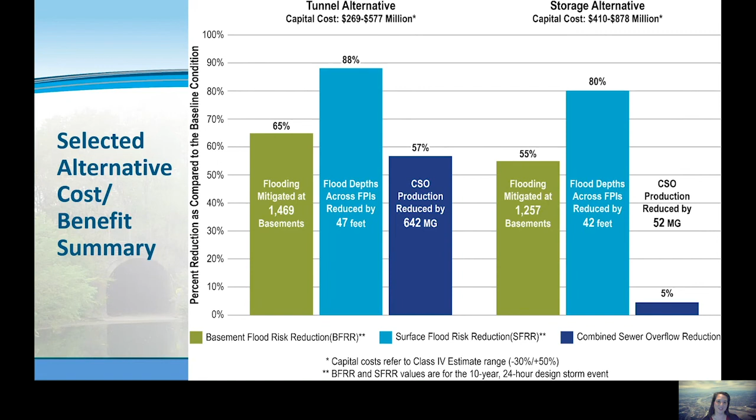For the significant design storm, which is the 10-year, 24-hour design storm event, flood mitigation at key FPIs involves significant feasibility and constructability concerns, as well as other factors. Careful consideration of these factors for each alternative must be compared against the flood mitigation and the CSO reduction benefits presented in this presentation and the report.

Key considerations for moving forward include the alternative performance. The PC SWMM evaluation capabilities for complex hydraulic scenarios is admittedly limited, and therefore computational fluid dynamics modeling will likely be required at each drop shaft and diversion location for future design efforts to gain a more complete understanding of hydraulic conditions. It is also anticipated that real-time control gates for either alternative would allow operational flexibility to maximize alternative performance for CSO reduction or flood mitigation as needed.

Hydraulic structure analysis: drop shafts, diversions that maximize flood diversion volumes, tunnel collectors, and the tunnel itself experience significant peak flows and rather impressive velocities due to the urban nature of the system, requiring an increased level of hydraulic analysis to fully evaluate performance. Laboratory studies and/or computational fluid dynamics analysis of these elements is needed before further design to fully characterize system performance and maximize diversion volume.